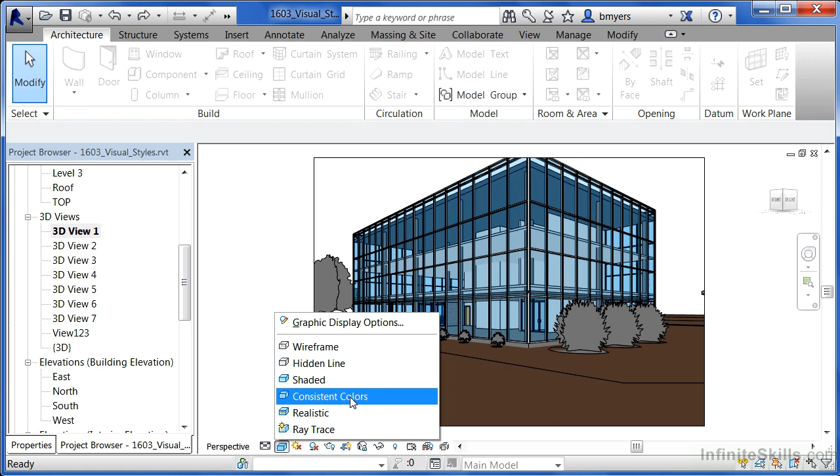A view's visual style affects the way that that view displays, and we can find the visual style on the bar going across the bottom of that specific view. In this case, the second box over is called Visual Style. Just select on that box. When you do, you'll see that there's really 6 different main visual styles. One is called Wireframe, and then it progresses on through Hidden Line, Shaded, Consistent Colors, Realistic, and Ray Trace.

Wireframe is one of the least used ones, but it does have its place. Wireframe does 2 things very well. First, it allows you to select objects that otherwise might be difficult to get to. So, if you needed to grab onto a ceiling or a roof, objects that otherwise might be sort of obscured by the lines that make up walls or other kinds of objects, by turning wireframe on, it means you can then reach up and highlight that roof object, which otherwise may have been nearly impossible to grab because it would have tried to select the wall instead.

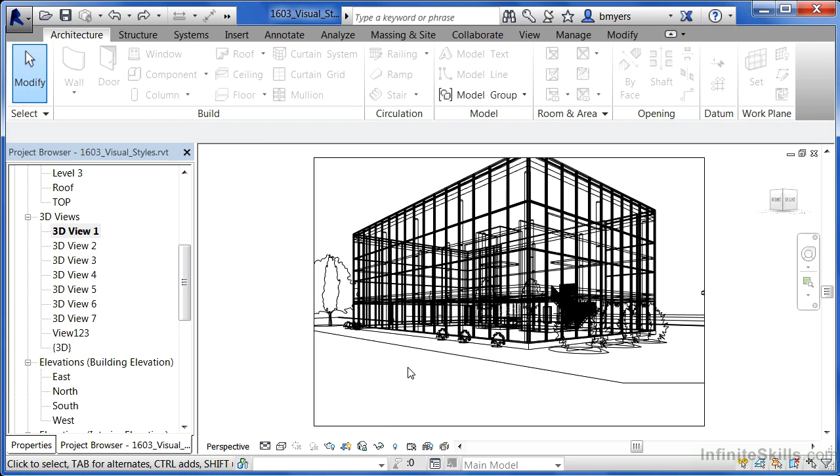Another good feature about wireframe is it's the fastest mode for Revit to process. If you have a very large model and you're trying to spin it around and see it from a certain direction, but the model is very slow in its processing, which happens from time to time, then turn on wireframe and it'll tend to be much faster. If we click down here again, it changes to hidden line. Almost all of your construction documents are going to be done in hidden line mode.

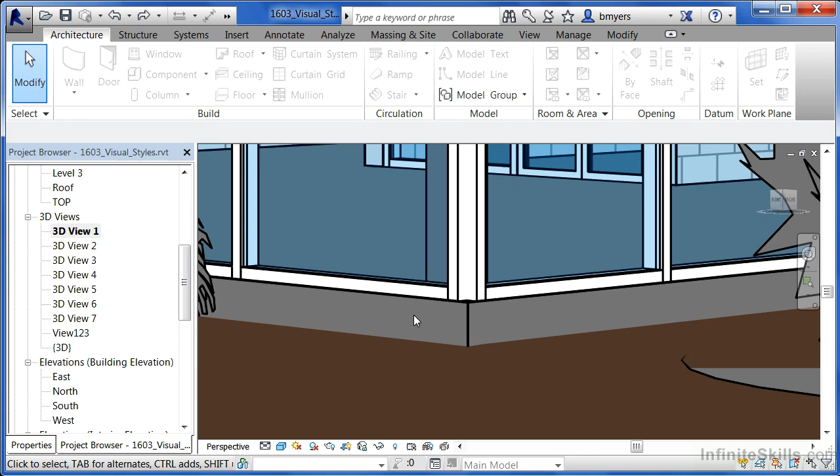Shaded? Shaded will just add different shade to this. We can see that it's light here, but there's shade applied here, and there's shadows on the floor inside of the building. Consistent colors? It's a lot like shaded, except it gets rid of the shade. Essentially, it keeps the colors intact, but it removes that shade so everything is the exact same tone if it's the same material.

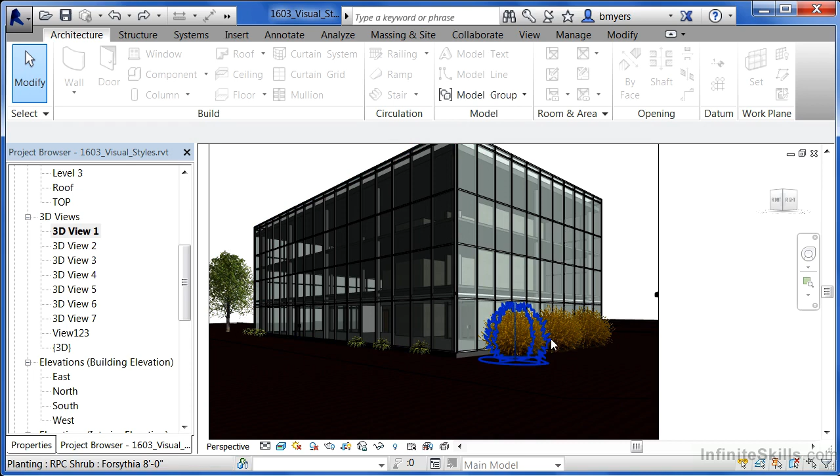The next one is realistic. This is a very good example of where it looks pretty realistic. Other times it doesn't look very realistic at all. But what realistic mode will do is if there's brick or block, it'll show it as being that kind of brick or block. If it's glass material, you'll be able to tell it's glass material. And of course, if it's plants like we see here, we'll finally be able to tell what that plant is going to look like when it comes time to render it.

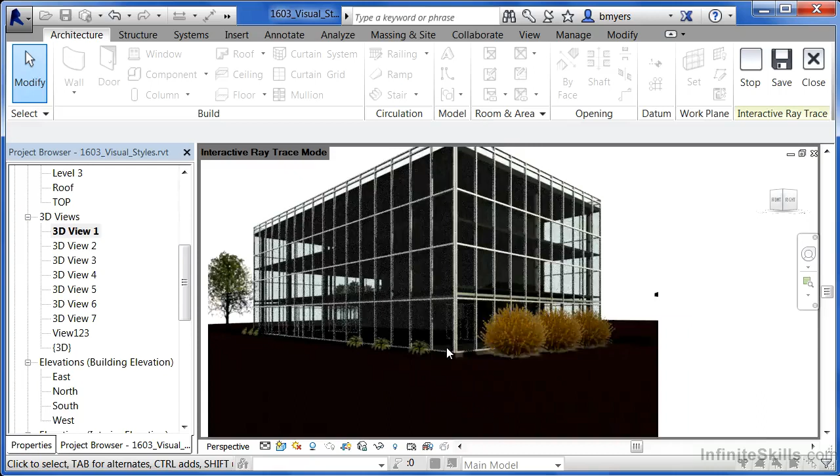Now, ray trace mode is by far the slowest mode. And if you have a slow computer, you can expect ray trace mode to take a good long time to process. As we're looking at this regenerate on the screen, we're starting to see certain dots begin to go away. Ray trace will continue to look better and better the longer you let it sit there and wait. Ray trace is doing a rendering on the fly on the screen. In fact, it's even possible to zoom in and zoom out while you're in ray trace mode.

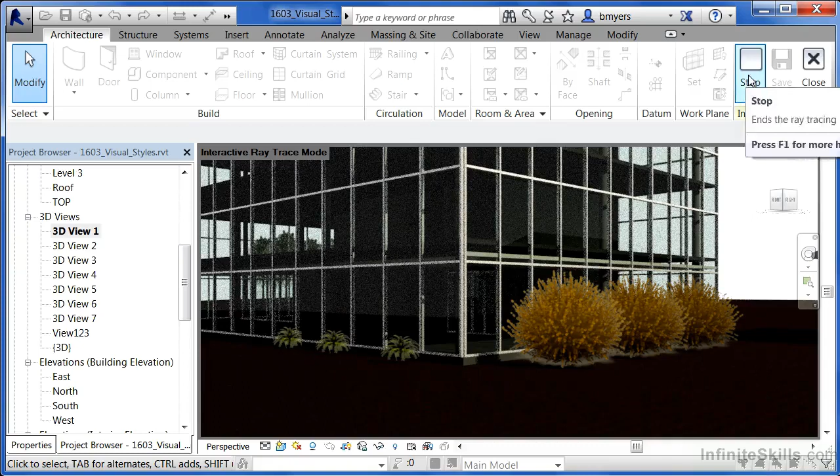The only problem, though, is that it takes Revit a long time to process that. So unless you have just a blazing computer, it probably won't be able to keep up. So I usually recommend not using it. But as we can see, it gives you a pretty good visual. And if I'd let this wait for 2 or 3 minutes, it would look like a rendering whenever it was done. To get out of ray trace mode, select the stop button and then click on close. It'll take you out of the ray trace mode and drop you back into whatever the previous mode is that you were in before.

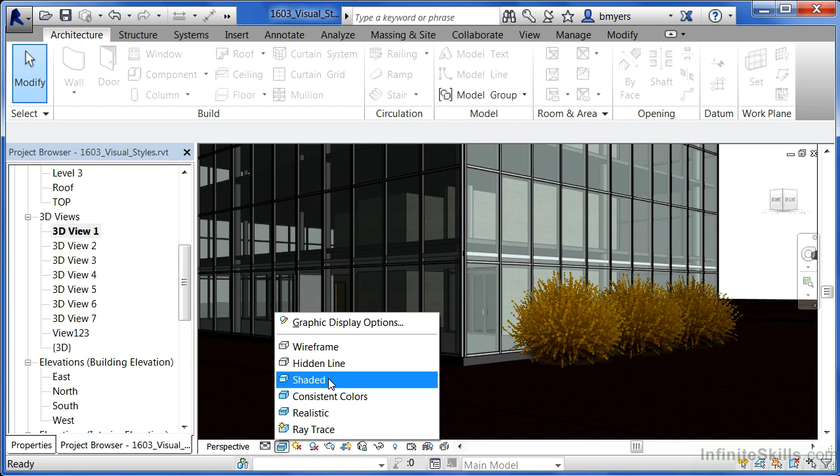So your visual styles allow you to see your model, whether it's in a 3D view, and this works in plan views as well, in a variety of different ways. The 2 that you're going to use the most often will be hidden line, because that's where you're going to do your construction documentation, and shaded, because it shows all your different components, such as block wall and the glass that makes up these curtain walls, with the general color and appearance without taking a very long time to process that information.